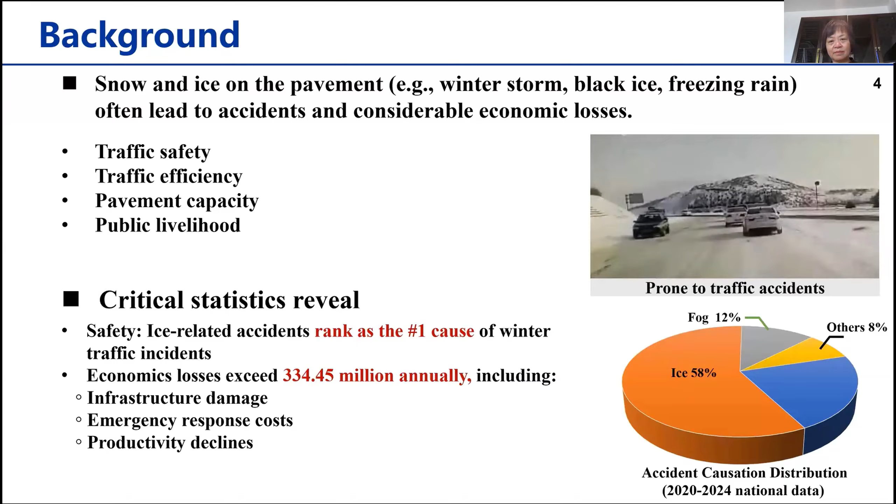Furthermore, annual losses exceed 334.45 million China yuan, including infrastructure damage, emergency response costs, and productivity declines. For example, in 2008 China, an ice and snow disaster lasted 33 days, covered 96% of highway and urban roads across 20 provinces, disrupting travel for over 100 million citizens. Therefore, improving prevention and mitigation capability for ice disaster is imperative.

However, there are two major challenges in snow disaster prevention and mitigation ability. The first challenge is the lack of management and control in the ice-affected traffic operation process. The reason is it's difficult to assess the state of ice and snow on the road surface, especially for black ice and freezing rain.

Second is the complexity of the ice, tire, and pavement system, causing unclear friction behavior between the tire and the icy pavement. The third is the difficulty in predicting ice and snow conditions on the pavement surface, lacking early warning methods for traffic operation.

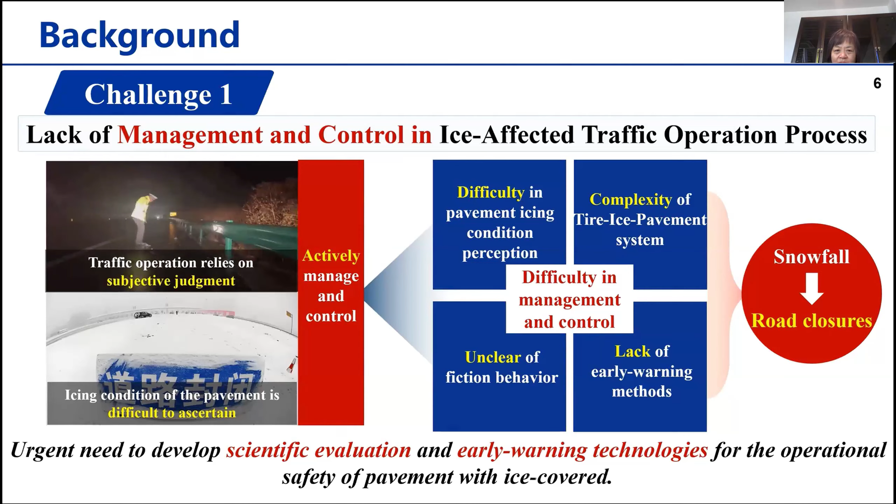The second challenge is the weakness of pavement anti-icing and anti-skid capability. The conventional solution, snow and ice removal, involves passive operations like snow melting agents, mechanical de-icing technology, and manual snow removal methods. These approaches present compounded setbacks, including environmental pollution, lower efficiency, and higher investment. Moreover, these methods normally cannot remove the snow and ice very cleanly because of the tight bond at the interface between the ice and the pavement.

So methods that enable the pavement surface itself to possess anti-icing and de-icing capability would be the best way to solve this major challenge.

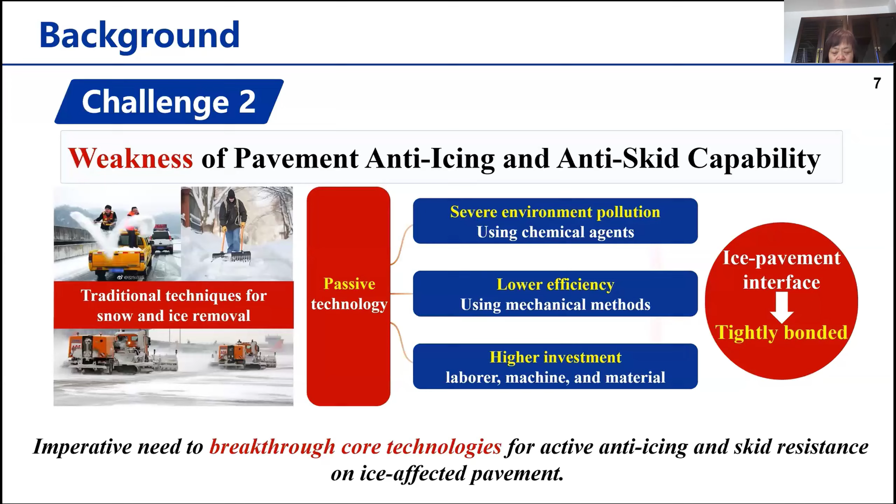For solving these challenges, we identified several research objectives. The first is to establish the skid behavior theory of the tire-ice-pavement interface system. It is fundamental interfacial mechanics.

Second, we propose methods for operational safety assessment and early warning on icy pavement according to safety potential field theory.

The third is developing active icing and skid-resisting pavement, including new materials development and energy conversion systems in pavement. The last is to create a technological framework for proactive ice and snow disaster prevention, providing solutions to overcome disaster mitigation challenges.

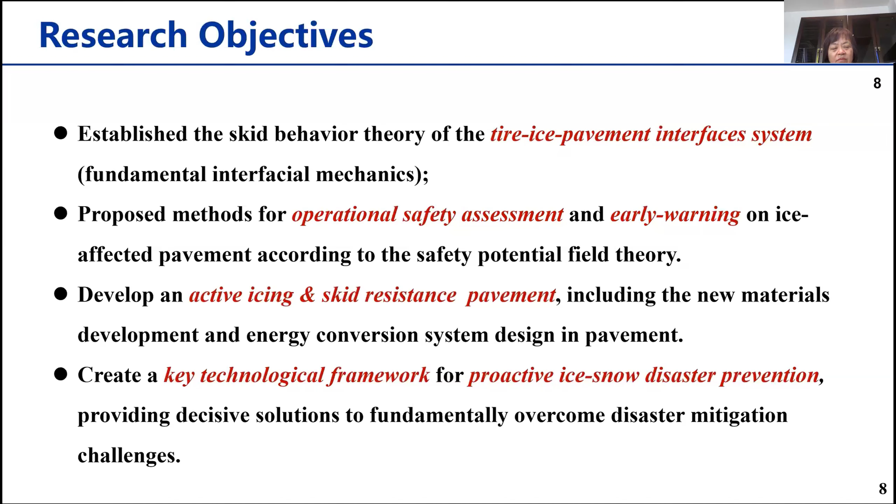To achieve these objectives, our team has conducted extensive research and achieved some innovation results. First is the theory of anti-skid behavior in the tire-ice-pavement interface system.

First, we developed an ice sensor on the surface of the pavement. The working principle of the sensor is based on the fact that the frequency of the piezoelectric film is sensitive to the state of water. When the film is dry, it has one frequency. When a drop of water is on it, it has another frequency. When the drop freezes, it has yet another frequency. So they can get different frequencies for different states of water.

From this figure, we can find the accuracy of the predicted ice thickness on the pavement is up to 98% compared with the real ice thickness.

We also developed a system including an ice monitoring sensor, snow thickness laser sensor, weather sensor, data collection unit, and data analysis collector, among others. This system can identify ice and snow conditions for dry pavement, ice, or snow, enabling instant, real-time, and accurate perception of the ice condition on pavement.

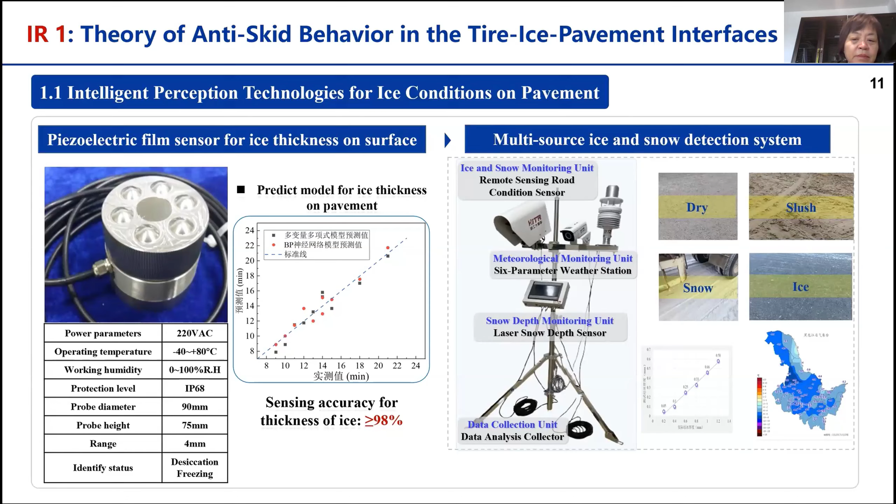Second part is anti-skid behavior on tire, ice, and pavement. Current evaluation methods for icy pavement skid resistance face critical limitations.

We built a multi-scale test platform, including the micro-scale road surface ice simulator, the medium-scale road surface ice and snow simulation system, the ice and snow road safety verification platform, and the full-scale ice and snow road test facility in Heihe, Heilongjiang Province. This platform can support simulation of ice and snow conditions and research into anti-slip theory for icy pavement.

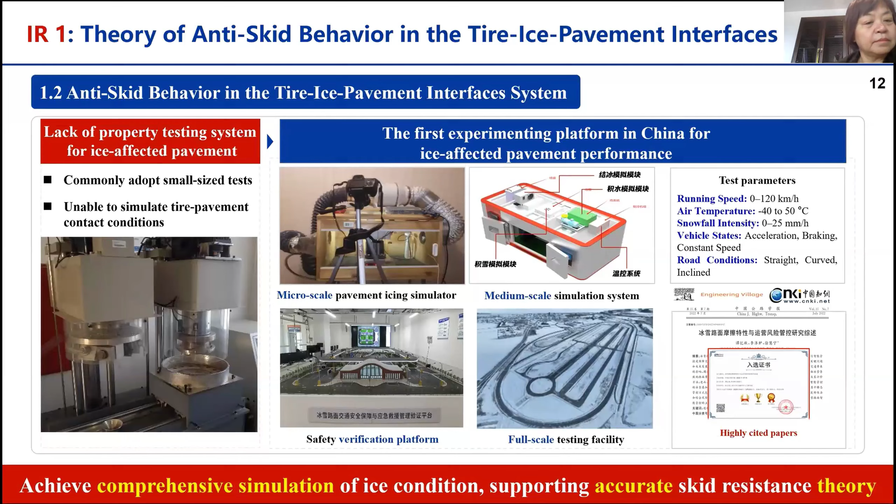Following are the findings of the research. First, we found the formation and growth process of ice on the pavement and the functional decay of pavement texture. From the picture below, we can see the degradation pattern of road surface texture with ice growth, and we established an approach to evaluate ice pavement morphology.

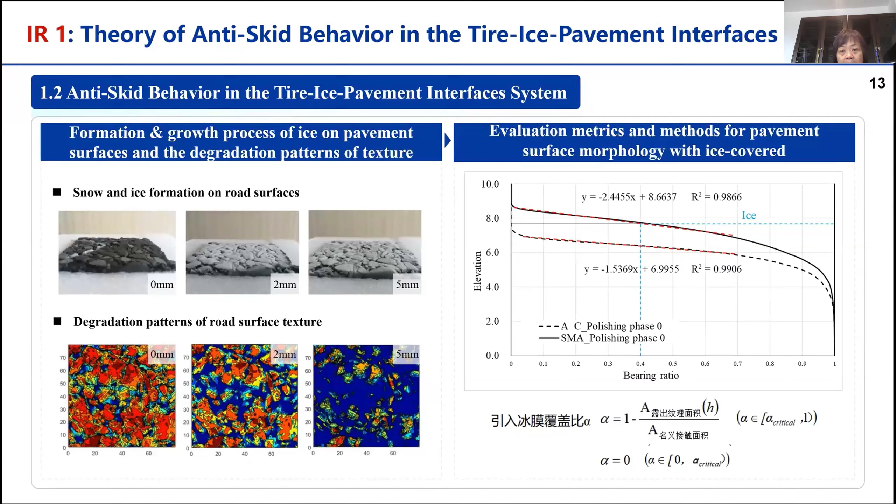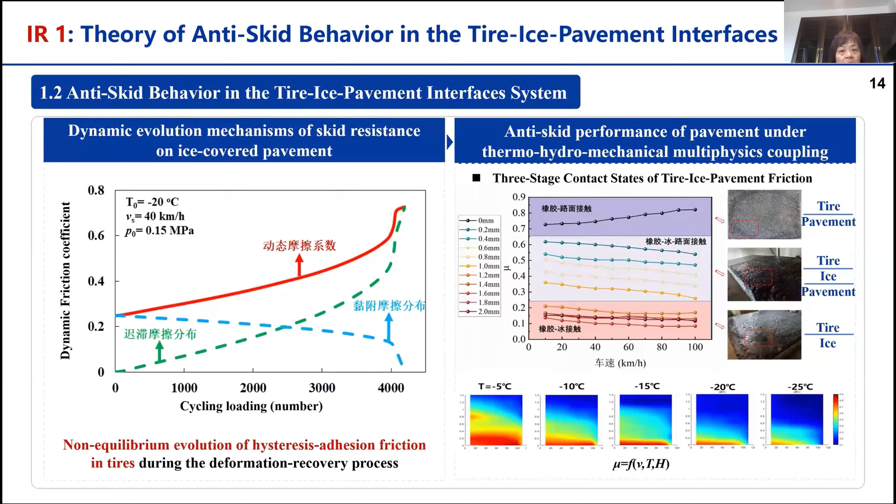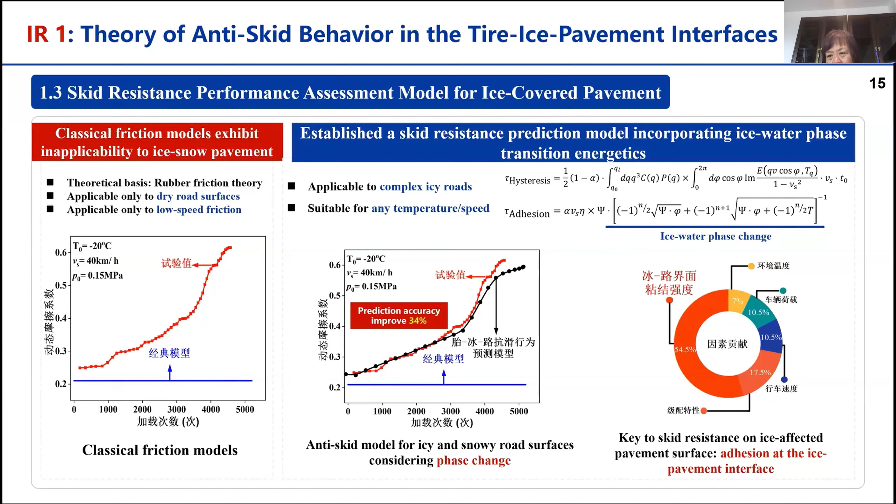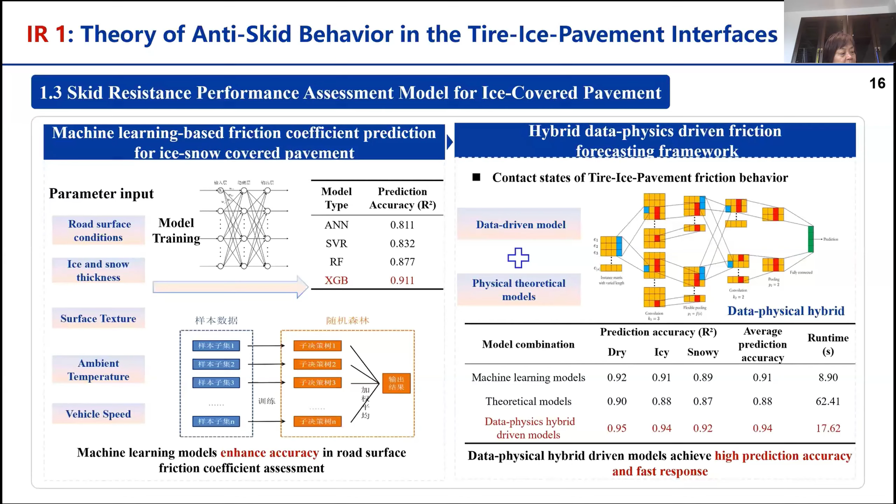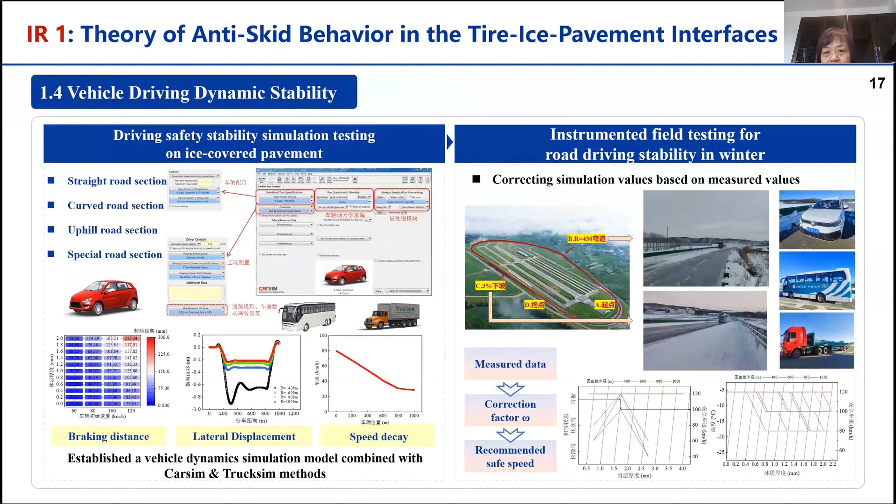After that, the integrated safety management and forewarning framework was developed. We can see this chart, the classification standard for ice and snow road operational risk warning level. Different levels have different speed and safety distance, which can break through the limit of traffic management in icy conditions, achieving proactive disaster prevention.

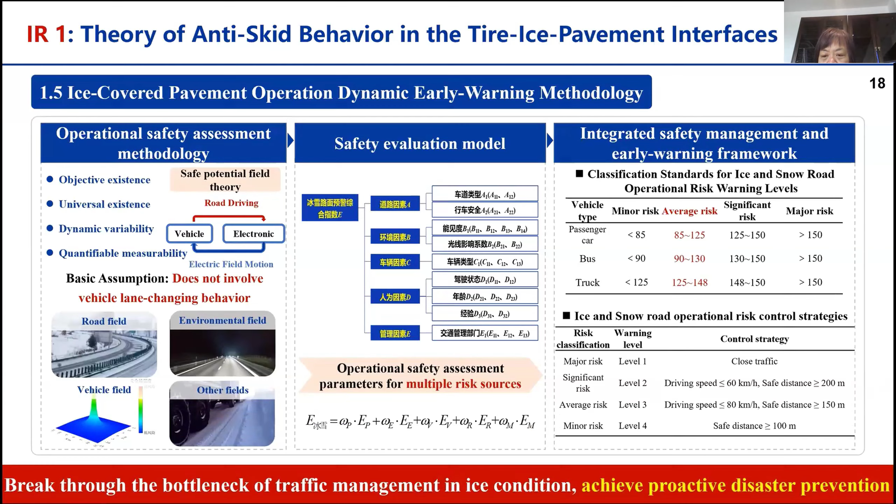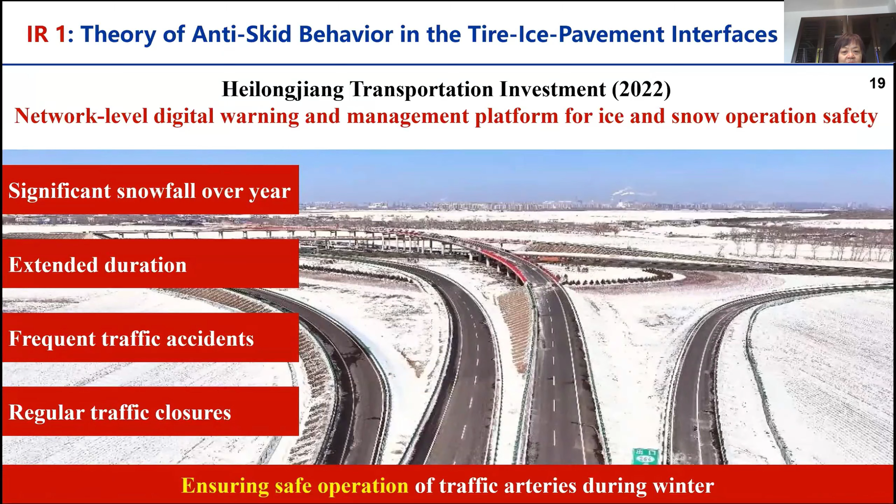According to these technologies above, we developed a network-level digital warning and management platform for ice and snow operation safety. Practice showed that the traffic open rate in ice conditions improved by 63%, and the traffic accident rate decreased by 30%, ensuring safe operation of the traffic arteries during winter.

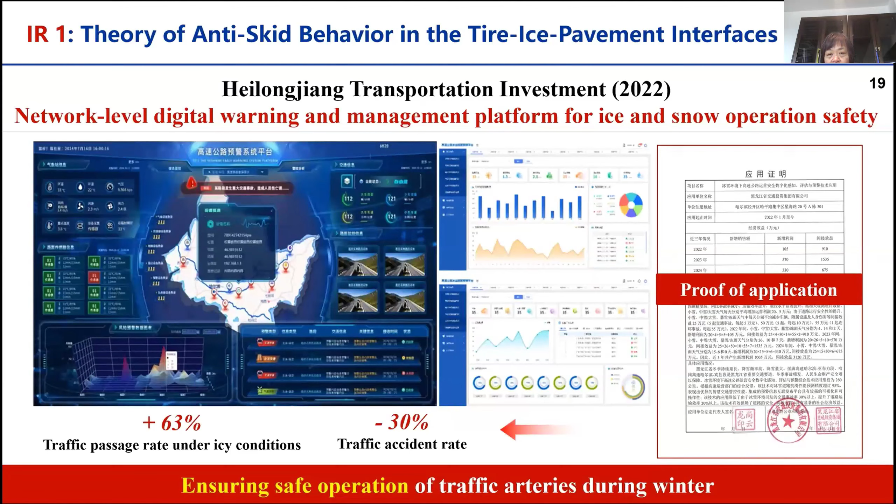Now I share another technology: the active anti-icing and skid-resistant technology, including materials, systems, and equipment that offer a smarter, more effective solution.

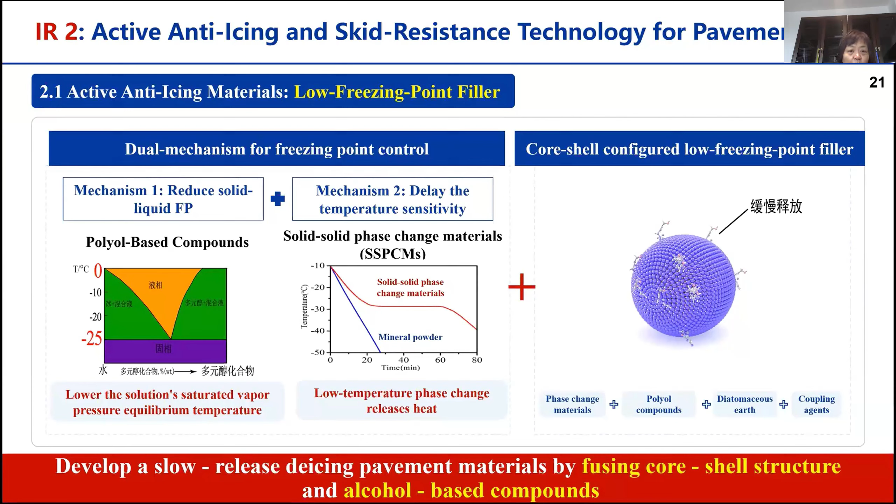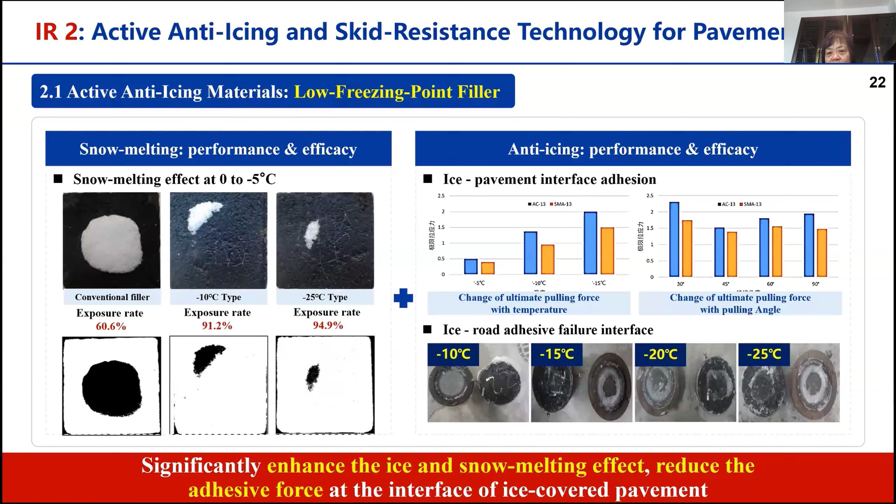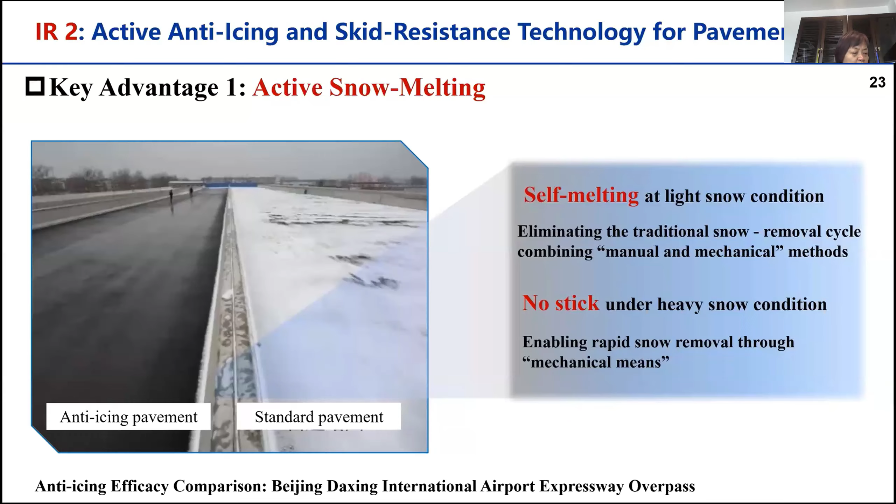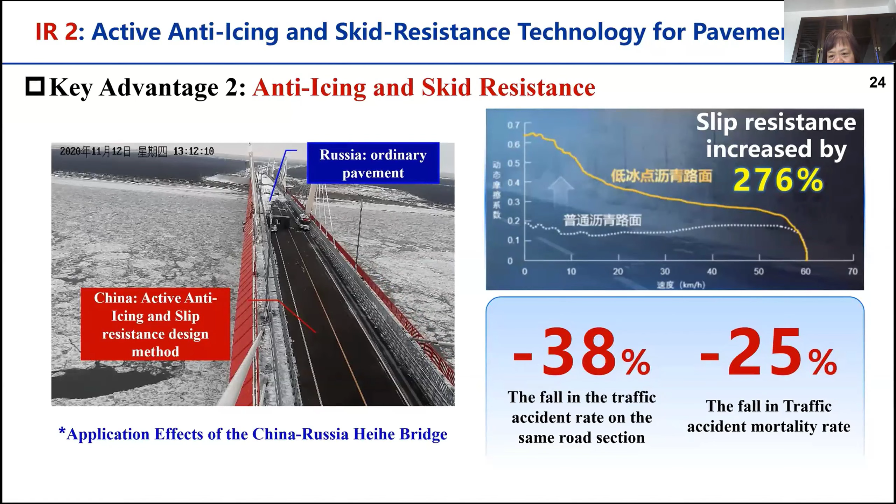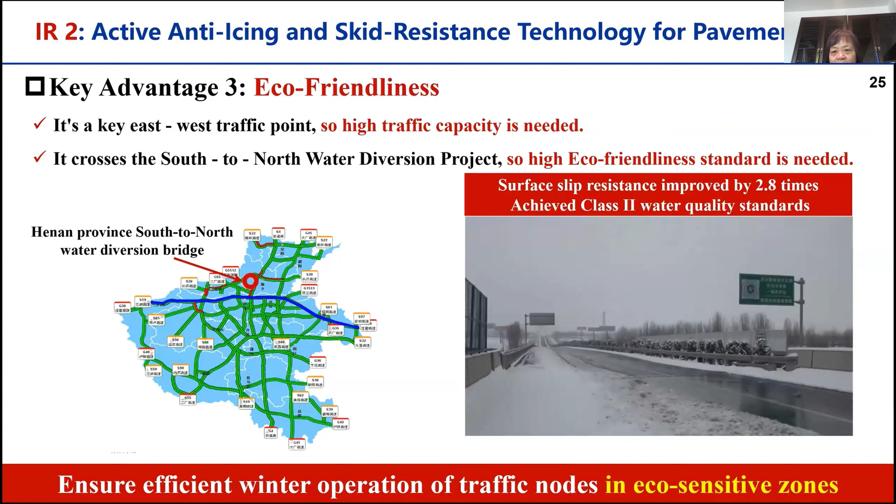The third advantage is environmental friendliness, demonstrated by the application on the South-to-North Water Diversion project in Henan province. First, it serves as a key east-west traffic artery requiring high traffic capacity. Second, since it crosses the South-to-North Water Diversion project, it demands eco-friendly standards. After using the materials, the pavement skid resistance improved by 2.8 times, and the water quality at the bridge reached Class 2 standards. This shows that our materials successfully meet both critical requirements in the region.

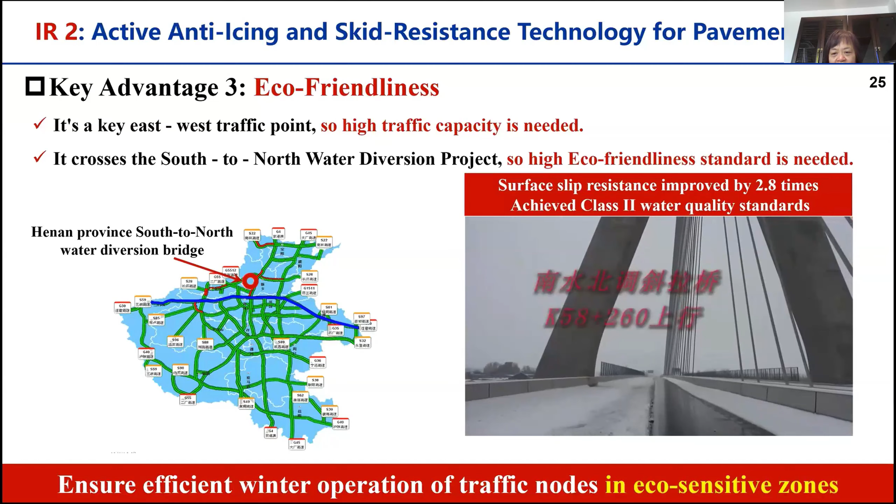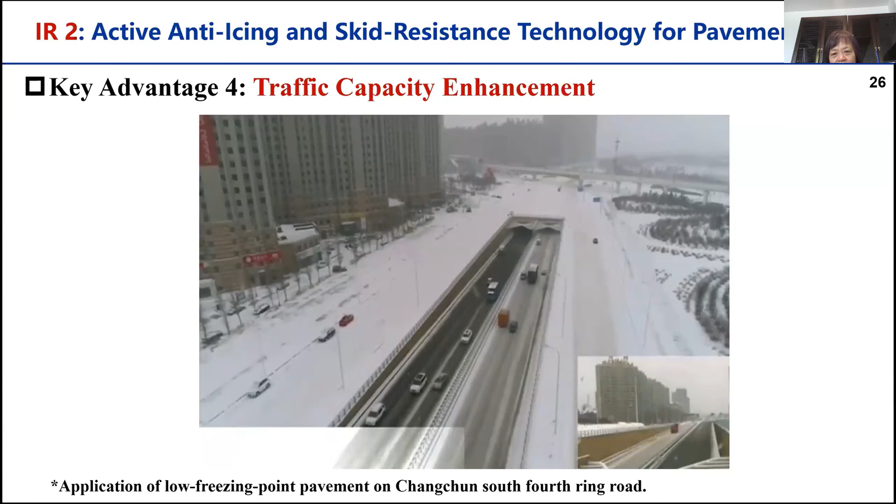A second material was developed, which is self-melting and self-healing, ultra-thin, using graphene microcapsules. Overall, this technology reduces the occurrence of potholes and delamination at the macroscopic scale, while slowing down micro-cracking formation and development at the mesoscopic scale.

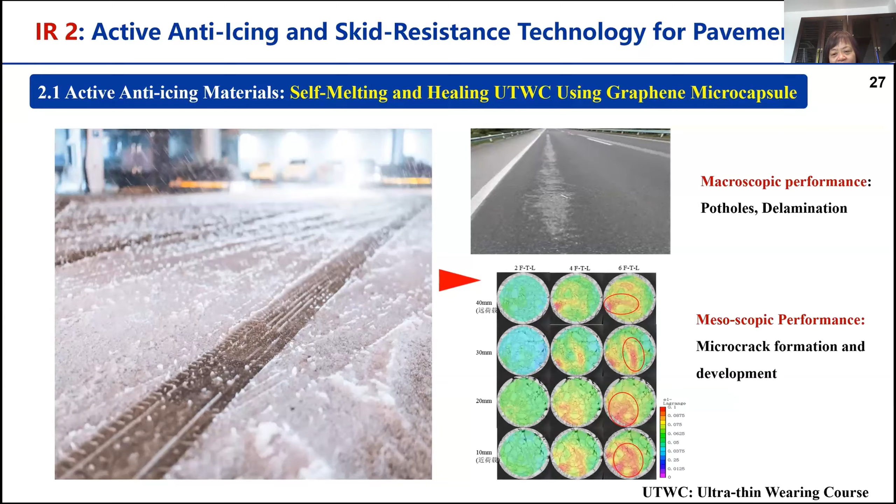This slide shows the core of the UTWC technology: graphene microcapsules. This technology addresses two key challenges for asphalt pavement in ice and snow conditions: ice resistance and damage control.

With graphene microcapsules, the pavement can self-melt to remove ice and snow efficiently. It can also self-heal to repair damage caused by cracking and wear. This ensures a safer and more durable road during winter time.

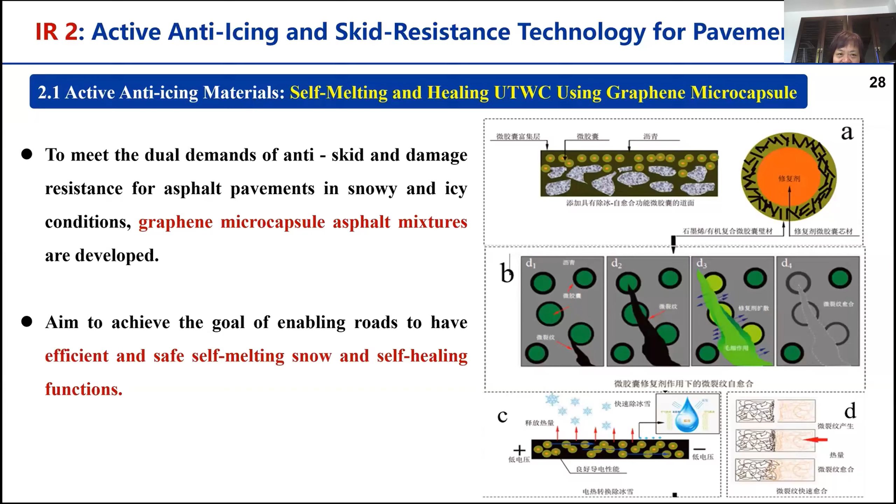We use resin and graphene as a multi-layer capsule wall, packing the asphalt rejuvenator inside. This enables a two-step self-healing process from the graphene microcapsule.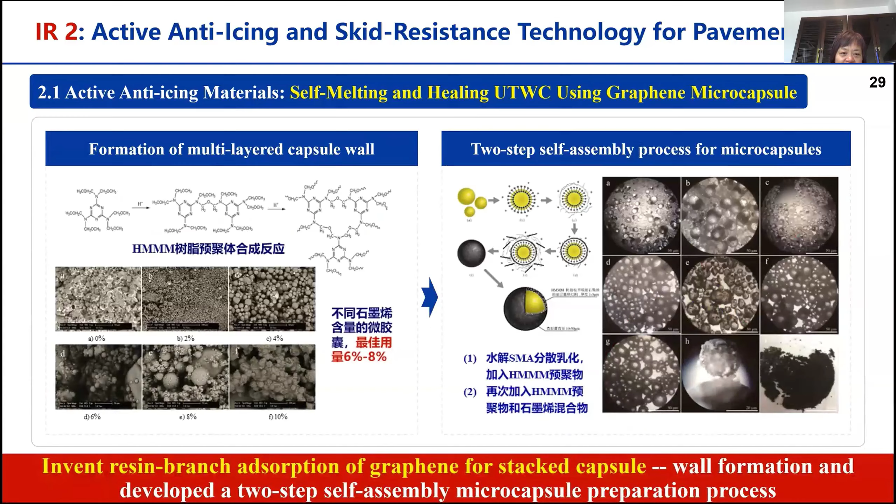This slide shows the results of the graphene microcapsules. On the left, it shows the effect of temperature increase and snow melting, while on the right, it shows the material's self-healing performance.

The results reveal that the strength of the ice-pavement interface is reduced by 59%, enabling efficient de-icing and promoting micro-crack self-healing. The healing rate, together with the temperature increase, is up to 81%.

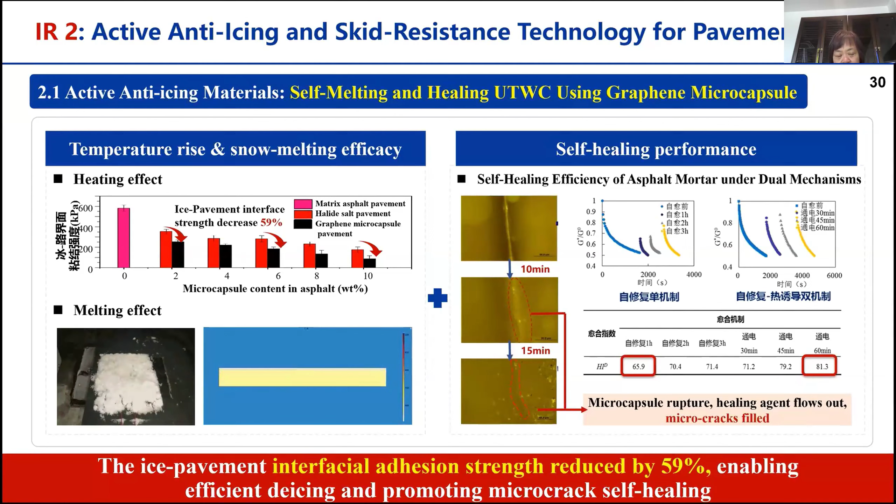This technology has been successfully used in the flight zone of Xinzheng International Airport in Henan, the largest airport in central China with heavy traffic. It experiences infrequent heavy snowfalls, along with 56 freeze-thaw cycles per year.

After applying these materials, the road surface temperature increased by 10 to 12 degrees within 2 hours, demonstrating a significant heating effect.

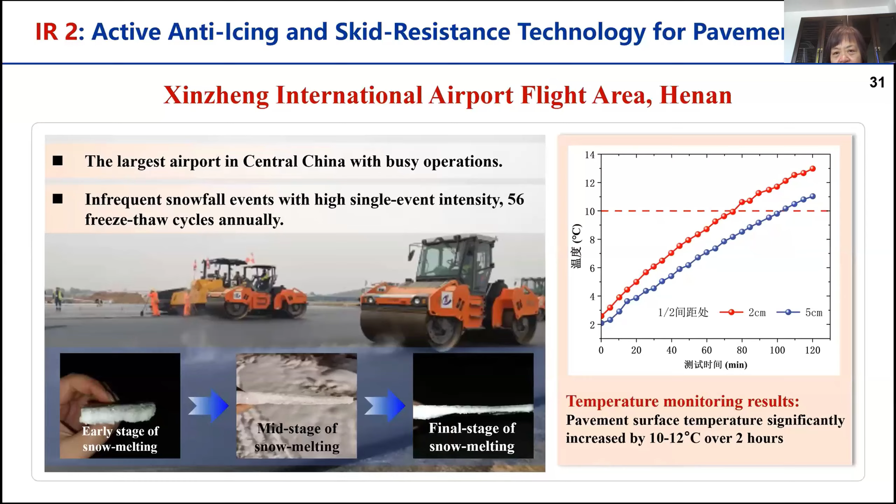The technology we discussed above focuses on newly built pavement, but how do we enhance anti-icing and skid resistance function for existing pavement?

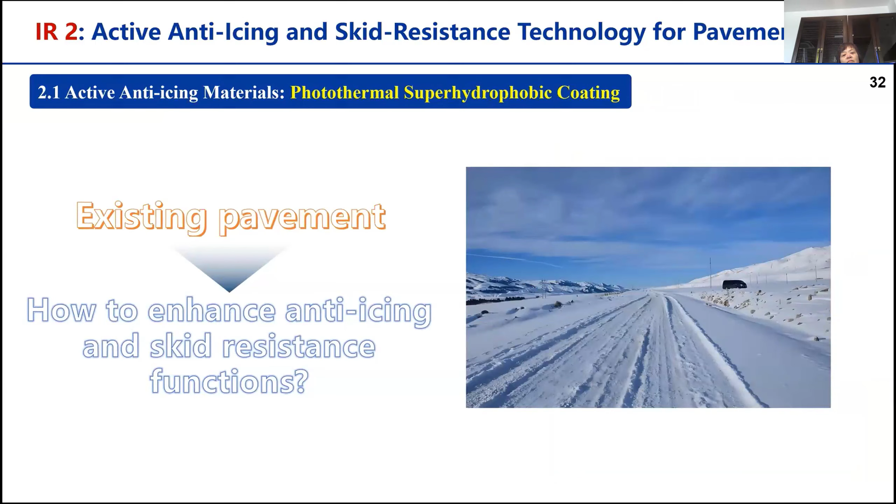So we developed a photothermal superhydrophobic coating for existing pavements. This material is based on mesostructure design and surface modification. It includes both a photothermal superhydrophobic filler and a photothermal superhydrophobic coating, working together to enhance anti-icing and skid-resistant performance.

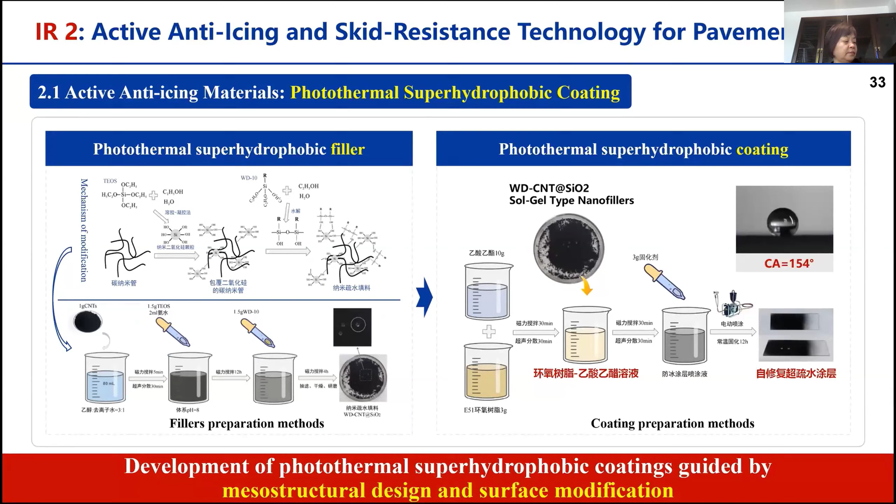This slide shows the application performance of the photothermal superhydrophobic coating. On the left, the de-icing effect is presented. At -5 degrees, the coating reduces ice-pavement adhesion strength by over 70%, increases surface temperature by 8 degrees, and shortens freezing time by two-thirds.

On the right, the anti-icing performance is shown. At -10 degrees, the coating extends the time for ice to form on the cold surface by more than 3 times. Therefore, compared to conventional pavement, the photothermal hydrophobic coating demonstrates remarkable anti-icing and de-icing performance.

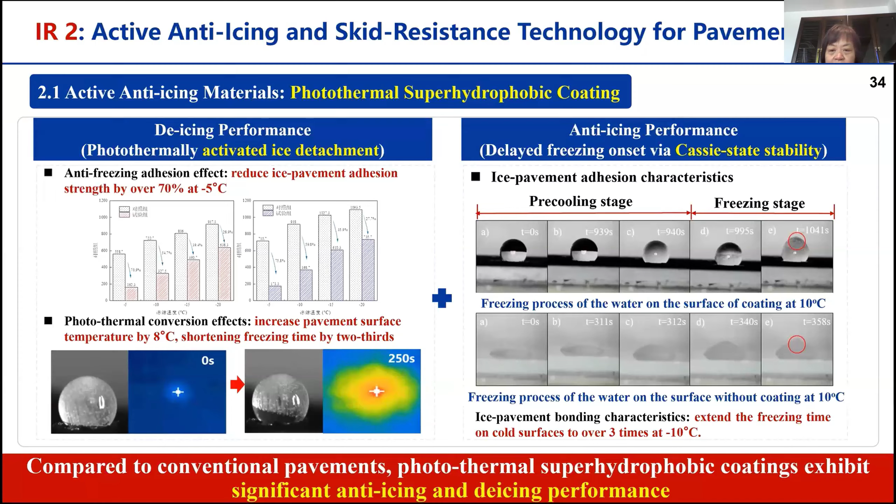Besides the materials mentioned above, we also developed an energy conversion pavement snow melting system for extreme conditions. This system can be powered by solar and waste energy sources, making it highly adaptable and sustainable.

It is designed to meet urgent needs where reliable traffic operations are critical, for example, de-icing on aircraft takeoff and landing platforms.

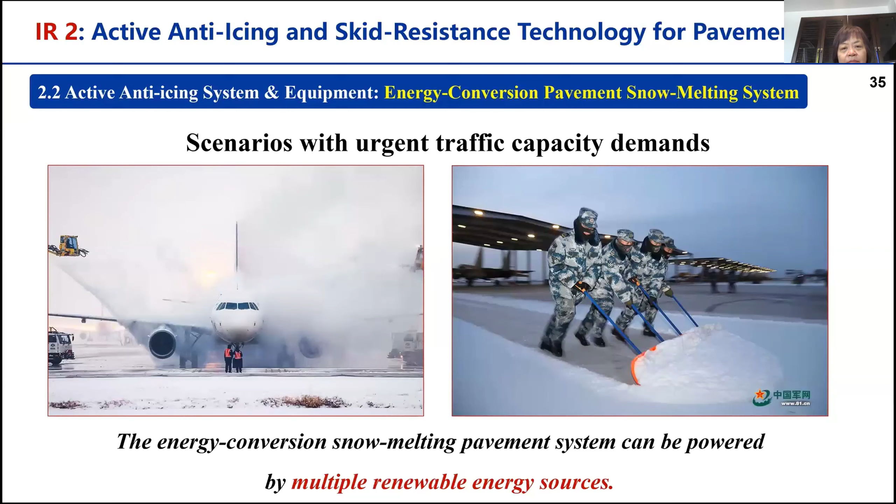This system can utilize diverse energy sources, including solar energy, geothermal heating, industrial waste heat, and residual heat from building heating systems. It remains effective even under extremely cold conditions, with a working temperature down to minus 30 degrees.

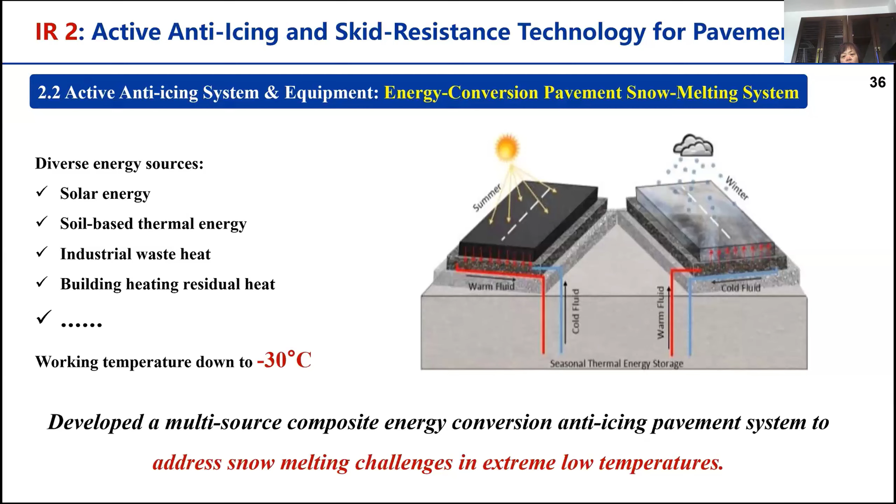To develop this snow melting system, we built a temperature-moisture coupled snow melting model. The main challenge was to improve the accuracy of temperature prediction within the model by integrating modeling methods shown on the left with a coupled temperature-moisture calculation equation.

We successfully increased the surface temperature prediction accuracy by 42%, reaching the expected performance level.

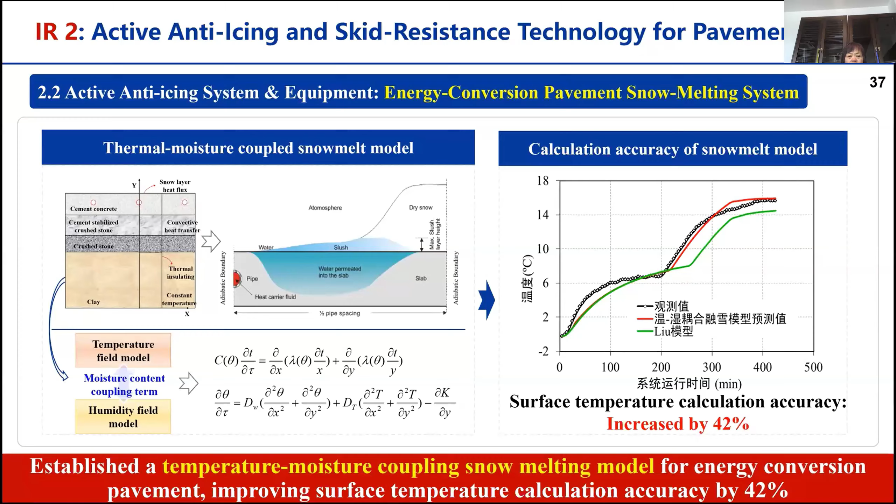At the same time, to balance efficiency and operational performance, our team developed a multi-objective optimization strategy model. Using a genetic algorithm, we solved the model and generated a nomogram to guide the snow melting system operation. Based on this, we successfully proposed an intelligent operation strategy for the snow melting system.

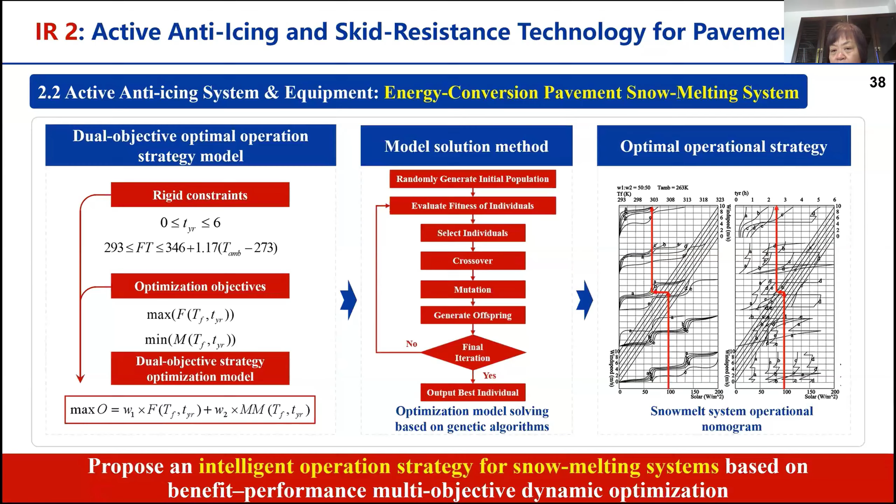We enhanced the regional adaptability of the system. Our team developed a unit area heat load based design approach for the snow melting system. Based on the data shown in the table, we established the design standard for the energy conversion pavement snow melting system, matched to different regions across China.

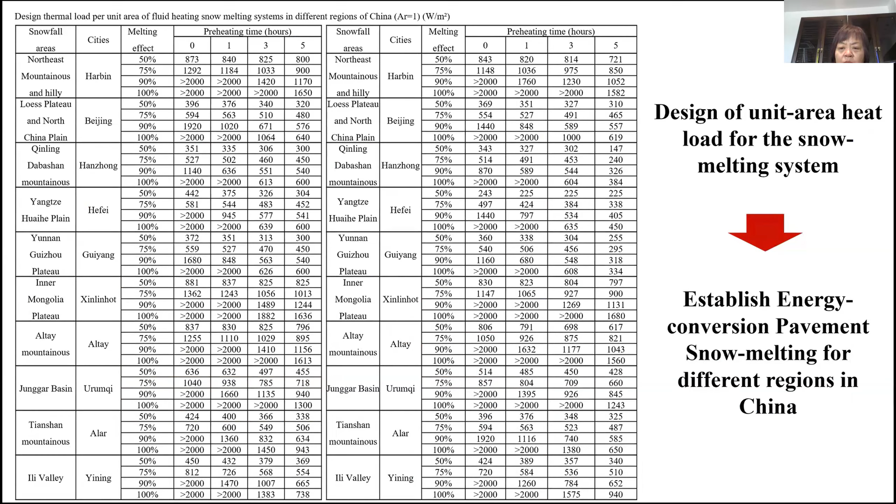We built China's first energy conversion snow melting pavement in 2008. As shown on the right, the system reached the expected performance within 4 to 6 hours, demonstrating its practical effectiveness.

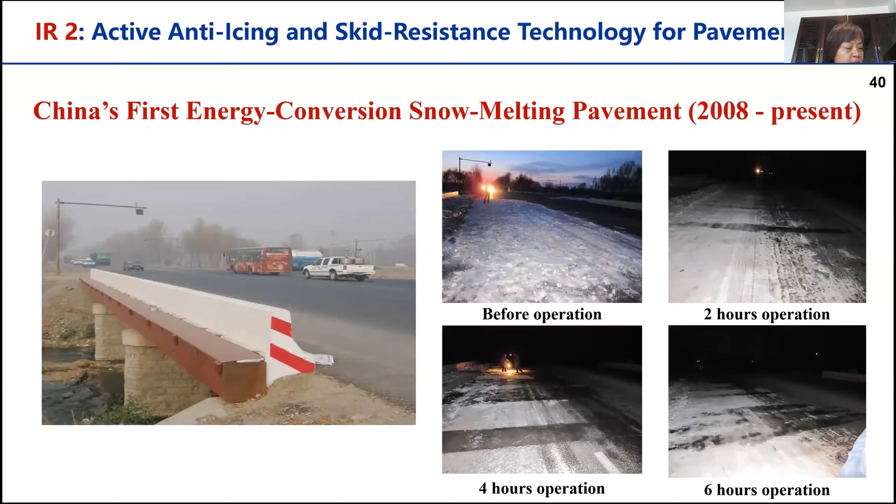The system was applied to the working zone of Beijing Capital International Airport in 2015. The test results were excellent.

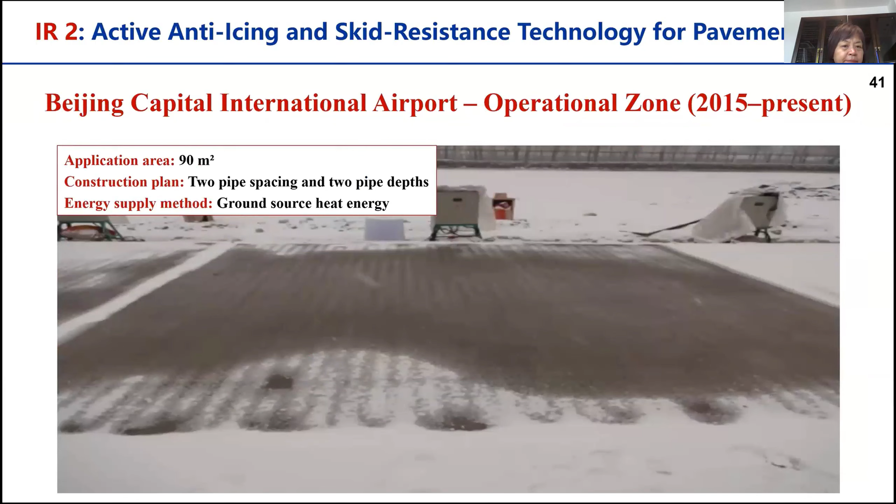In 2017, the systems applied at the Beijing Daxing Airport contributed to this major national infrastructure project. Practice has shown all-weather operation free of snow and ice, ensuring operational safety without manual and mechanical cost, saving significant labor and resources.

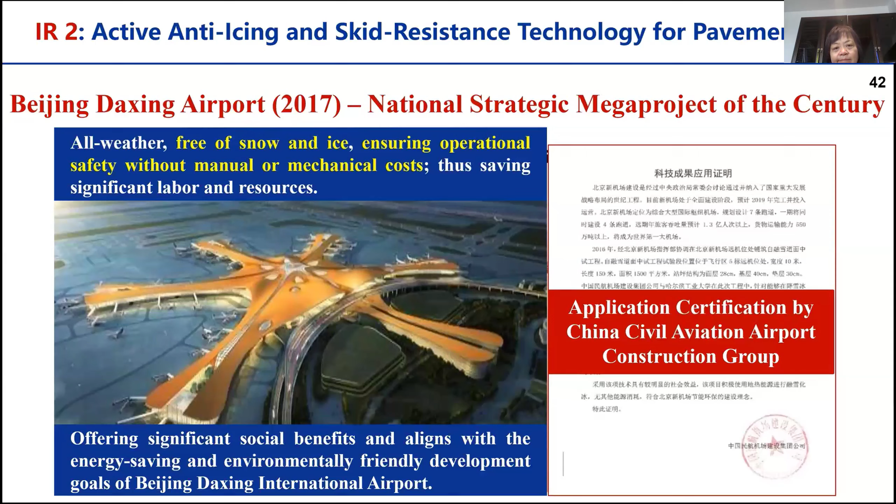In developing equipment, we created an intelligent laser target de-icing system. This technology uses laser point irradiation to promote the ice-pavement interface separation, while laser line scanning generates breaking along the scan path by rapidly applying thermal melting.

Compared to traditional de-icing methods, laser-based automatic de-icing causes less pavement damage and is more environmentally friendly.

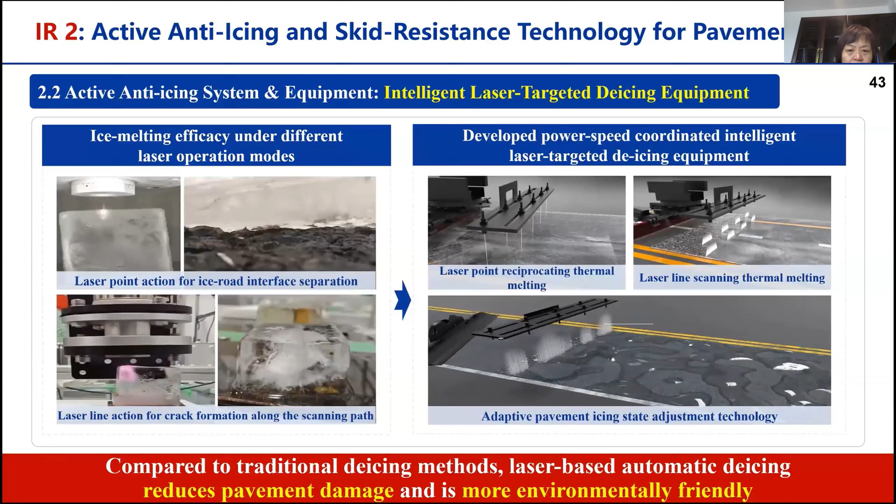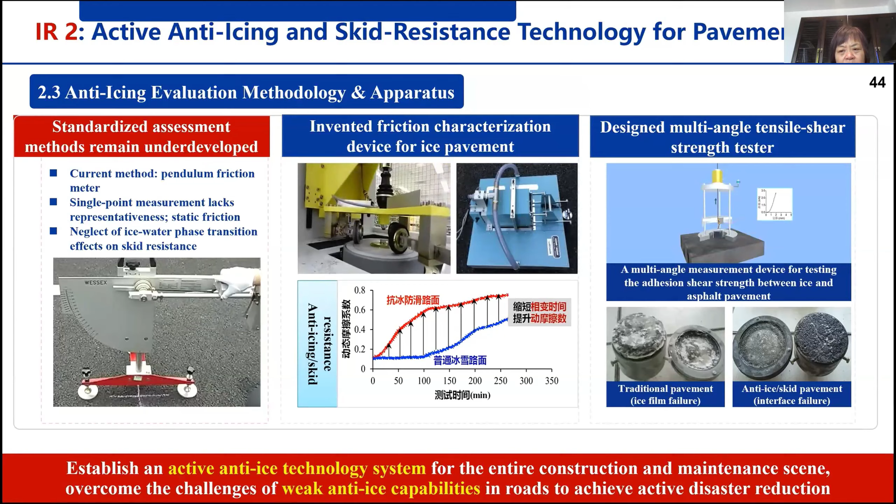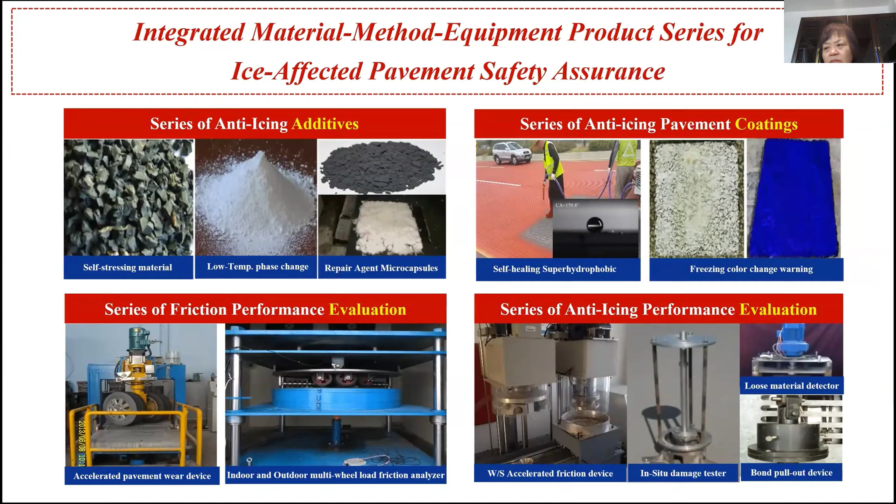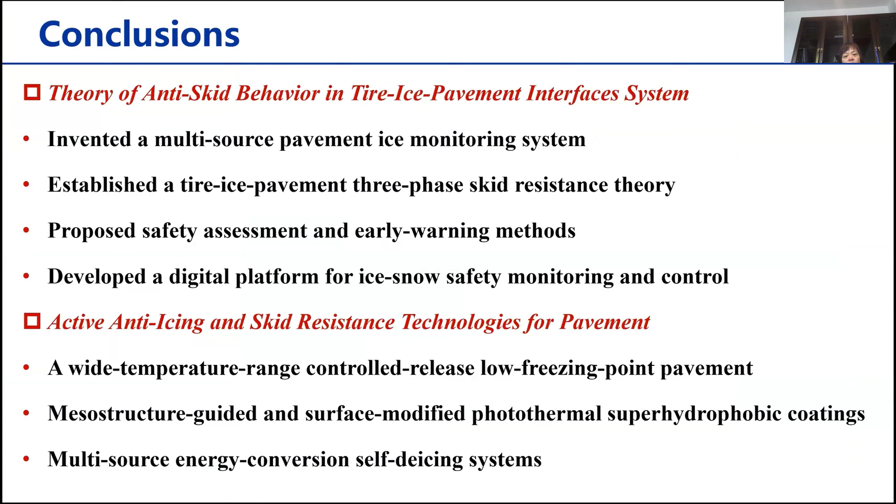Based on these innovation results, we reached some conclusions. First, we established the theories of anti-skid behavior in a tire-ice pavement system. Secondly, we developed active anti-icing and skid resistant technologies for pavement. And finally, we made anti-freezing design methods for asphalt pavement.

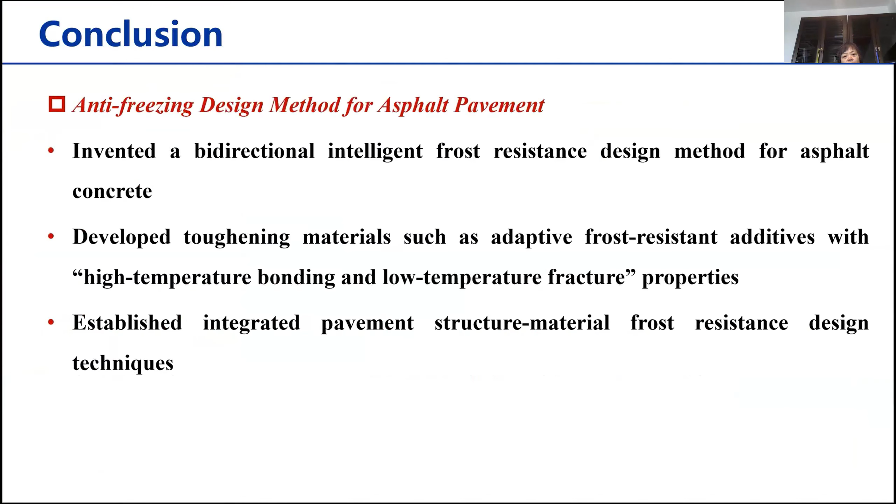That's all for my presentation. Thank you for your listening.

Thank you very much for that very enlightening presentation. I am not very familiar with pavement literature, so it was very educational.

So there are a couple of questions on the chat. I guess if Kara's still here, maybe you can unmute yourself and speak directly, but if not possible, I'll proceed to read the questions here. Can you see the questions in the chat box? Professor Tan, can you see the questions in the chat, or should I read them? At the moment, there is some... sorry, can you hear me? Yes, I can hear you. Okay, okay, I will check, there are some questions.

The first one from Dr. Koppelman is at 11:11. So how long does ice or snow cover the roadways in Beijing on average each year?

There are different times because China is very large and different parts have different conditions. For Beijing, maybe from November to next March or April, just like this, and each year there will be about 5 or 7 times per year. For China, for Heilongjiang province, it will be from October to next April or May. These times will have snowfall, and each year we will have an average of about 10 times. And each time, for example in Harbin, there is a snowfall that will close the highway all day.